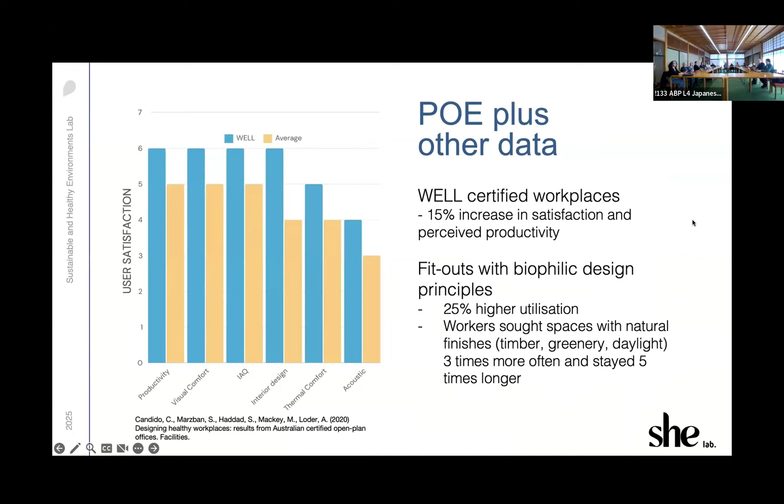POE data becomes very, very interesting when we move away from one-off building by building comparison to actually doing a database level comparison, because you can start benchmarking. Property industry loves that, because it's like, I'm better than my, they are the landlord, or they are the tenant, or whoever they want outside.

But also with stories around, very commonly recently, we are the very first in Australia to have a score in acoustic comfort. Mind you, these are all open plan offices, so acoustics suck, right? That actually breached the 3-point mark. So it means that out of a 7 being the maximum score that anyone can ever get, they got a 3.7, that was reason for celebration, because the average benchmark is only 2.8.

So being able to say we outperform in specific points, it gives people leverage of data from a competitive edge perspective. But by doing that over time, which is the other graph there, we've been able to demonstrate changes, right? And that one is particularly interesting because you can see on the blue line that acoustic comfort post-COVID has really taken a hit.

And I would speculate that this is our tolerance to acoustics going down, but our expectations being on the rise, because we know better now, because we have our own bespoke office setups, and we know now that we don't have to have that sort of exposure in a shared office.

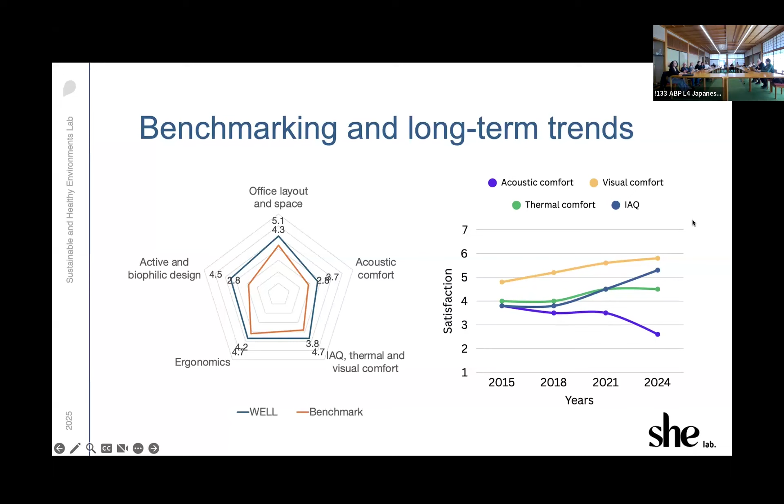All of these data, of course, we can also start celebrating case studies. I think the fact that we have, out of the top 10 buildings in our database, 3 actually being adaptive reuse, but also went through a massive HVAC retrofit, dispels the notion that you can only do well if it is a new build. So out of the 3 buildings that I mentioned, 2 are heritage buildings.

And they really invested a lot of time to make sure that those spaces were delivering on what they promised back to building occupants, because the buildings matter a great deal to those people as well. So there was that story of love and care around the relationship with the building. We're about to start another one that is actually here in Melbourne, and I'm actually looking forward to that. So our adaptive reuse and retrofitted buildings, which we have 3 out of the top 10, as I said, do really well, as the data show.

And they do really well in things that are quite curious to me. So for example, visual comfort, natural light, I'm not surprised because they put a lot of effort in the way that the facade was being designed and how they changed. I think all the building owners were particularly pleased in terms of the indoor air quality and thermal comfort achievements.

But I think from an interior design perspective, there was a really big surprise because people didn't want to move into that space, because in all of these spaces they implemented desk sharing. So it was an activity-based working environment, but people were still satisfied with this space. That was quite surprising.

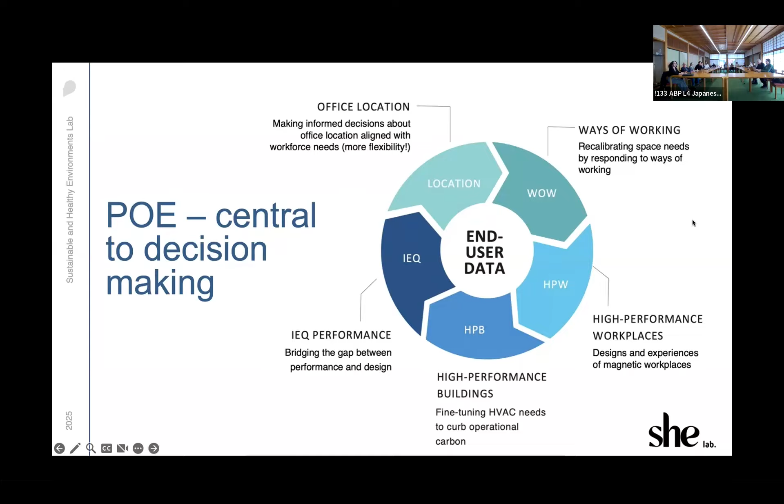This was actually a portfolio level POE that we did. We had about 100 offices, and the most important question back to them was how satisfied people were with the building location, but also with commute times. So they used that to inform the next location of the entire portfolio, which is kind of interesting.

So in short, POEs can be used very successfully in these 4 different ways that I've seen over the years. From a diagnostic perspective, they can be quite useful to understand what is happening now, but also over time. Before and after interventions are very popular and very peculiar to the Australian market. I don't see that elsewhere around the world. It provides a really good baseline to work with, but also provides an opportunity for you to test the interventions, if they worked or did not.

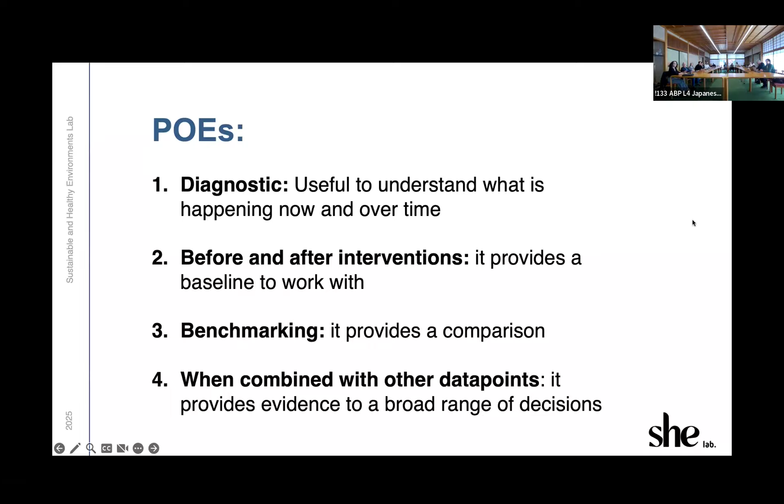Benchmarking provides a point of comparison. So being better than the next person or the next building is quite important from a competitive edge perspective. And when you start combining all the data points, then it provides bigger picture evidence for a broad range of decisions that is not just about people and people productivity, but also other types of decision-making that you have to make on these spaces and the layouts of those spaces.

That's it from me. I think I'm on time. Well done, Christhina. Breaking from tradition and actually finishing on time. There's lots of really good stuff in there.

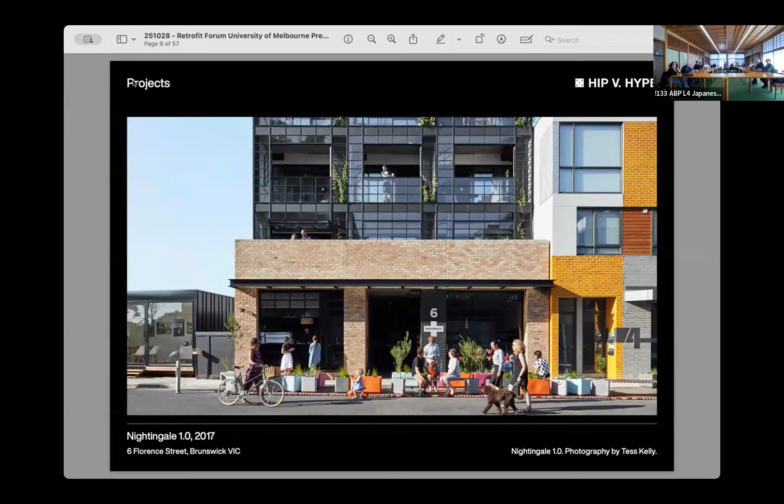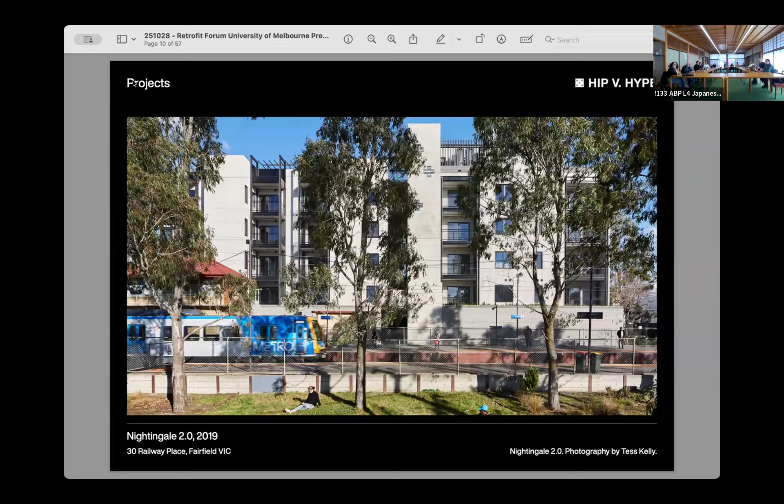Some townhouses in Abbotsford. We helped to set up the financial model that exists behind Nightingale. That for me was really, having studied architecture, going across to private development, really putting that learning to the test in helping to set up the investment structure and the procurement model for the first two Nightingale projects. We were investors in both of those projects. This is Nightingale 2 in Fairfield, still to date the most difficult project I've delivered on a railway line, but pertinent given some of the ambitions for our city at the moment.

This is a small sort of Baugruppen model that we tested, 3 townhouses in Brunswick. We had the Premier here a couple of weeks ago announcing a new policy, which was kind of cool. And we lived in this project, and that front fence got plenty of use during COVID. Sort of an interesting idea here, we actually set up a shared ownership structure over that front yard. Typically, your front townhouse is always worth more than the rear two due to its frontage. So we set up a shared ownership model for each of the 3 townhouses over that front yard. And it's a space that we really enjoyed using as a collective. This is 5 years later, we shot it recently.

A really important idea for us is this idea of architecture of future heritage value. So when you're designing and building a building, what are the decisions that you can make that could enable that building to be loved and want to be protected by a community in the future? It influences what materials you use. It influences how you detail those materials, how you can expect a building to perform over time. Landscape obviously plays a huge part. Ruskin Elwood down the canal in Elwood, 5 years later, again, buildings that age gracefully and become part of their community. I think developers don't think enough about these sorts of ideas.

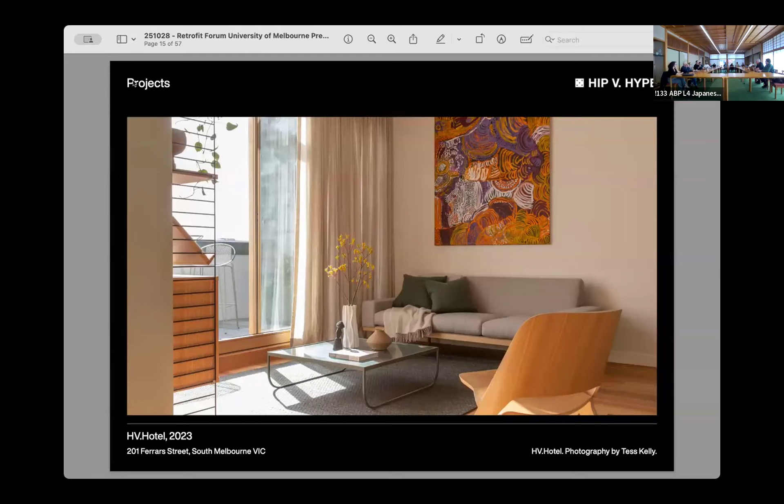And one of our focuses for this space is to get as many conservative-minded people in here as possible. And so we've had all sorts of ministers from both sides come into this space, bankers, lawyers, you know, the types that are usually quite skeptical of the benefits of sustainability. And when we bring them inside and we close that door and I lock it, it's a light bulb moment. It's a great experience. Tangibly, it is quiet. And for anyone that's been in a passive house level home, you get that feeling of fresh air due to the HRV.

So this is the rooftop at Ferrars & York, nice community space. You get a hard time putting a fireplace in a sustainable building, but sustainability is more than just carbon. And that fireplace is the heart of the building, and residents use it regularly and they connect within that space all throughout the year. I think that's also really important to note.

And sustainability, I've sort of been through that, but post-occupancy research. So our model is one of, we design, we build, we finish, we live in, and we want to know whether our design's performing as per our assumptions. And with an in-house team, we have an ability to throw some resources at that. So some of the questions we ask are: is systems design optimized for efficient, effective operation, and are systems commissioned properly?

So we had a relatively small sample size in this project, 20 apartments. We tested 2 apartments. On our future project, which I'll get to, 61 apartments, and we would love to find a research partner to look more meaningfully at post-op performance.

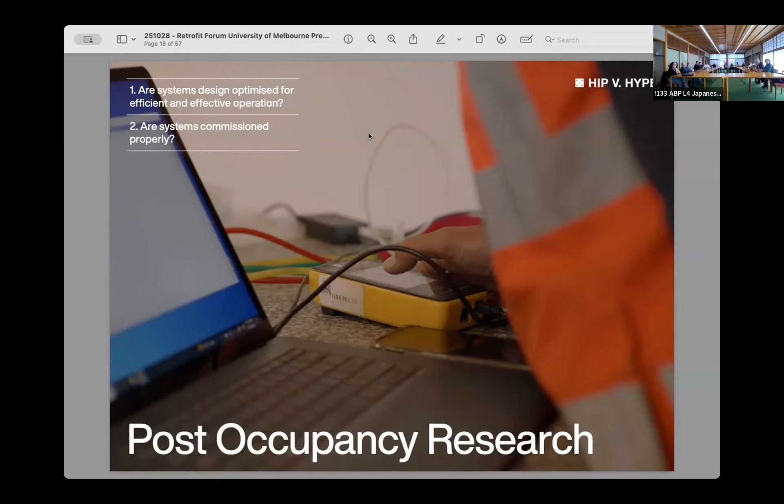Here we go. So during construction, we had our teams on site. We were tracking all sorts of things around how builders were performing in accordance with the sorts of assumptions that are built into NatHERS, the small things like insulation installed around penetrations. Turns out guys just cut big squares. NatHERS modelling assumes that it's cut tight. Got plenty of photos of it not being the case. I wonder how many buildings around town are built that way. Yeah. So those sorts of things.

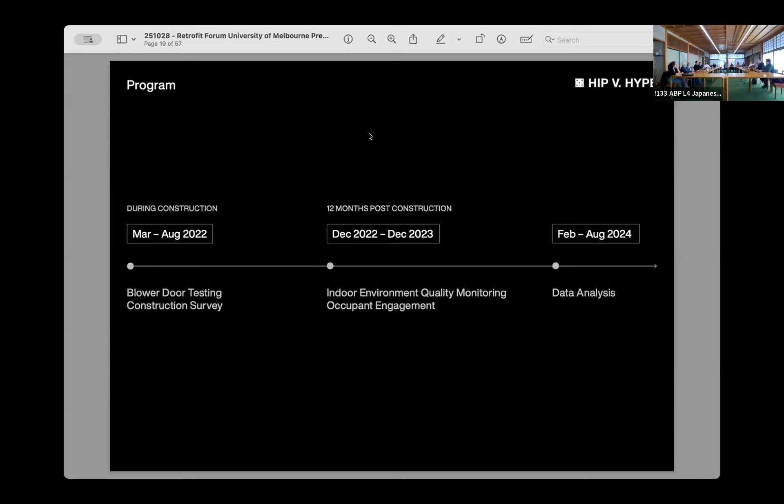We did a blower door test to set a baseline. We didn't try to achieve high levels of air tightness on this project and found some interesting results. Then we did about 12 months, so we got 4 seasons worth of post-occupancy data and spent too long analysing the data. But anyway, quite a few data points.

And this is the apartment that I'll talk to. This is the apartment I lived in for the last 3 years. I've just recently moved out. It's my little family, Katia, our 2 boys, Masi and Elio. It was 185 square metre, 3-bedder, built to 8.1 star NatHERS with a heat recovery ventilation system installed.

We, knowing what we know, having tested the performance of Nightingale 2, will not build an apartment to current code without HRV installed. What we know is that the air tightness of current code compliant apartments is significantly lower than 5 air changes per hour. So we're looking at needing active heating and cooling, active mechanical ventilation in apartments that are code compliant, let alone built to the level that we're achieving.

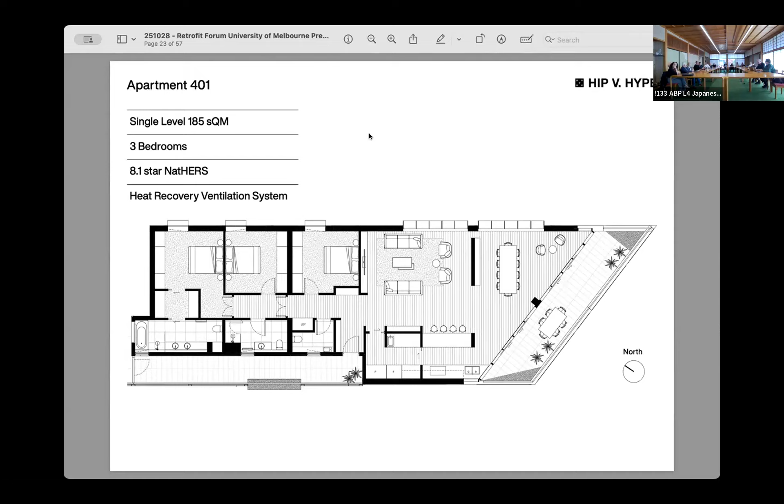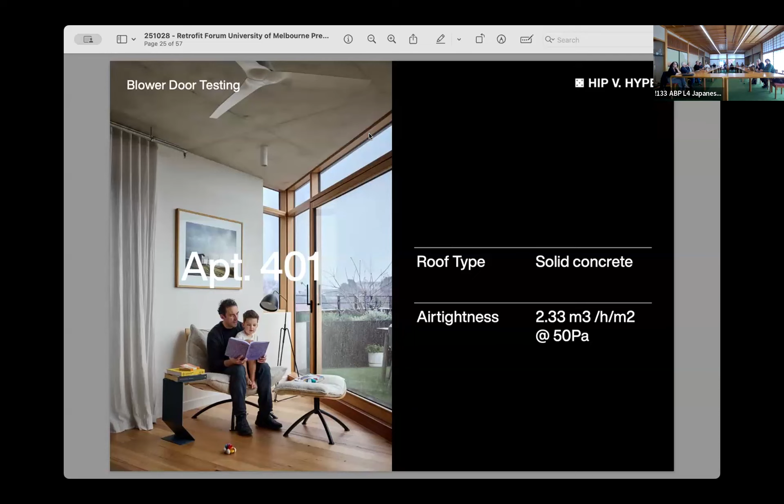Blower door test, this big fun day. Concrete box, fire standards have improved, all penetrations are being inspected now. Window installation regimes have improved in accordance with minimum compliance requirements. This apartment, without trying, achieved 2.33. It's really interesting. We've got a massive problem with the disconnect between what we're actually building and what our mechanical design assumptions are assuming in terms of system design. So yeah, buildings are growing all sorts of fun stuff at the moment.

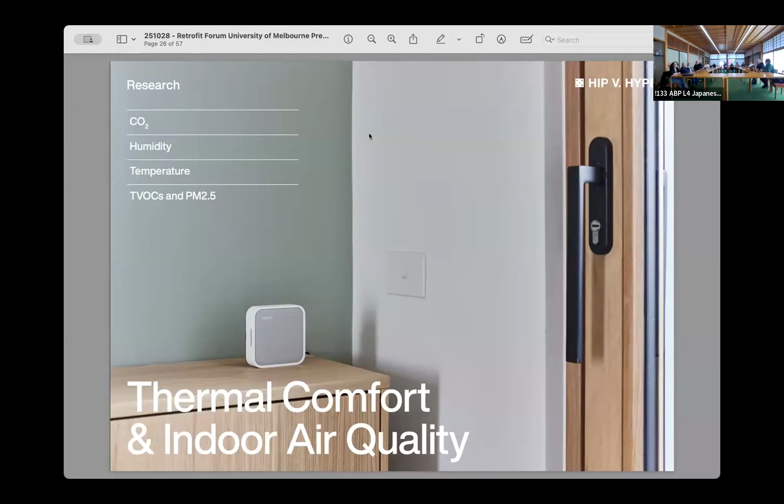It's fair to assume. We put Awair sensors in. We weren't as rigorous as Pippa in choosing our device. But we thought they were pretty good, and we put one in, and just testing key metrics, I guess, of IEQ. And like I said, we had about 6 sensors deployed in this one apartment and 6 in another apartment through that 12-month period. What we learned, it's a pretty cool graph. So the solid band in the background is the WHO comfort band.

The dotted line, the green dotted line, is what Homes Victoria regard as their thermal comfort limit, which is high and kind of scary. And then you've got minimum and maximum daily outdoors, which are the bounds to this graph. And then we've got our apartment 401 temperature. So we were lucky enough to have some control periods. The apartment was unoccupied basically for a month through January, so we've got a really good control through the middle there.

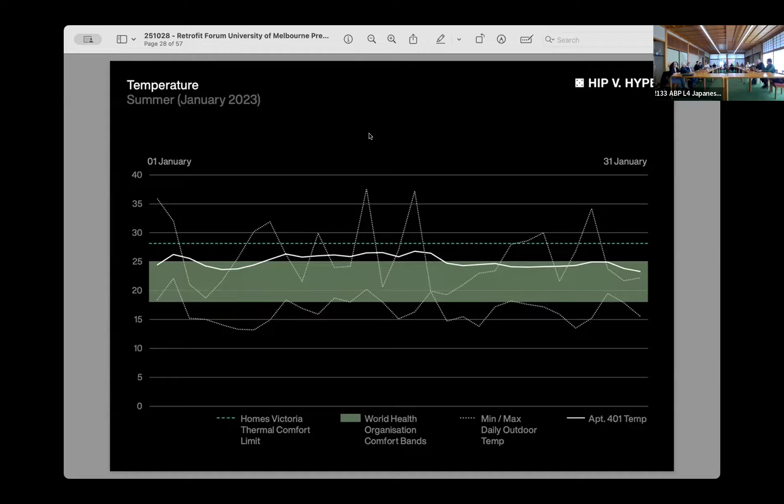We've got 2 days creeping up towards consecutive days. We've got a bit of a heat wave, 37, 38 degrees. Apartment's staying well below Homes Vic, peaking its head above WHO, but generally sitting within WHO thermal comfort band without any active heating and cooling, and zero management. So external blinds were down to the east, but no management, no flushing at all. It's pretty compelling. It's a small sample size, but pretty compelling.

In winter, around a couple of weeks, the apartment was unoccupied there through the middle. What we see is a steady decrease in apartment temperature. Again, unoccupied, no active heating and cooling, steady decrease, steady state temperature sits just under 18 degrees. And then we came back and obviously heated the apartment up. Interestingly, there's no apartment above, and both apartments below were unoccupied, so we weren't enjoying the benefit of thermal transfer either.

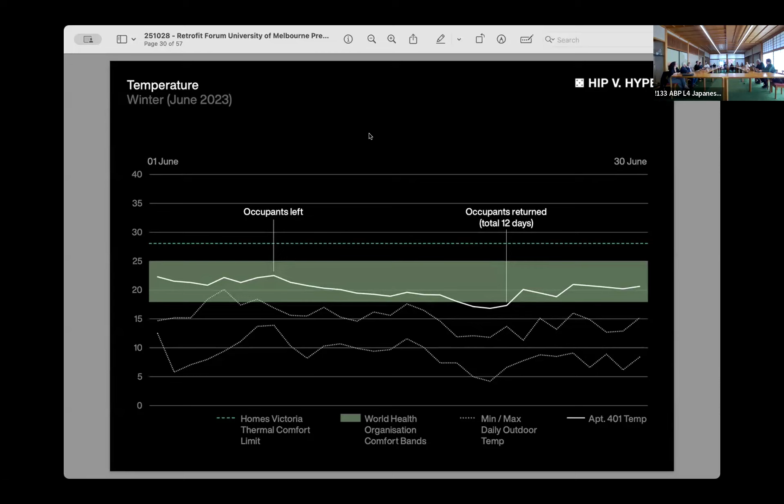And does Homes Vic have a minimum thermal comfort? Not that I'm aware of. They probably should. And we don't have an average Victorian to compare it. It's scary. I'd love to know if someone's got the bottom of the chart on some of this. Some of the stats we hear are that in the average rental apartment, the overnight temperature is below 10 degrees internally. And definitely HV's stock would probably be performing outside of that. I work with people that deliberately don't put the heating on because they can't afford to pay the bill. This is part of our little point. That'd be interesting.

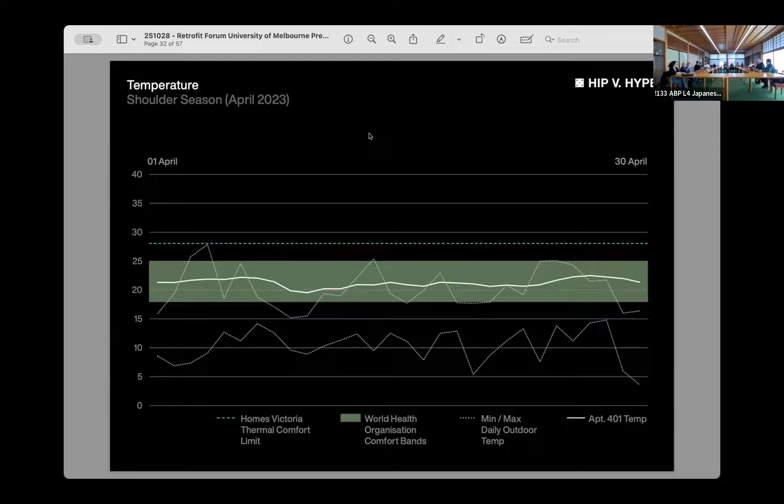Shoulder season is where we get the best performance. This is really where apartments in the Melbourne climate are optimised with HRV. This is where you really get the benefit. So you're just not turning heating and cooling on at all. With the apartment closed, if you want to, you're living very, very comfortably with incredibly good IEQ performance. And having lived in this apartment for 3 years, it's just testament to the quality of life that you enjoy.

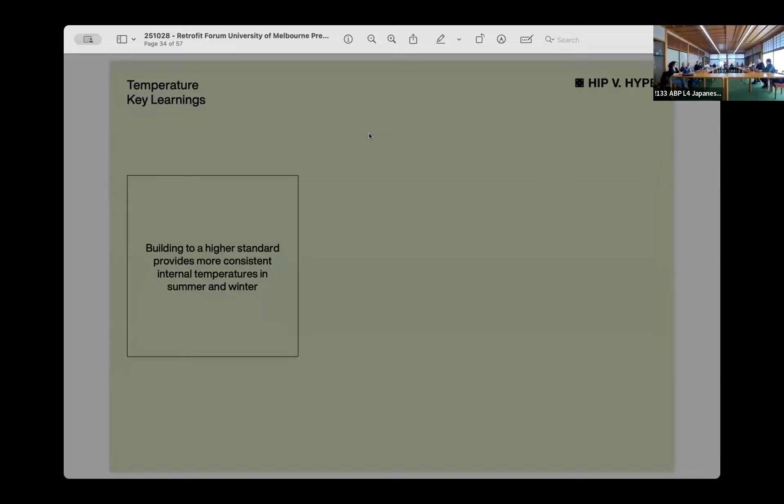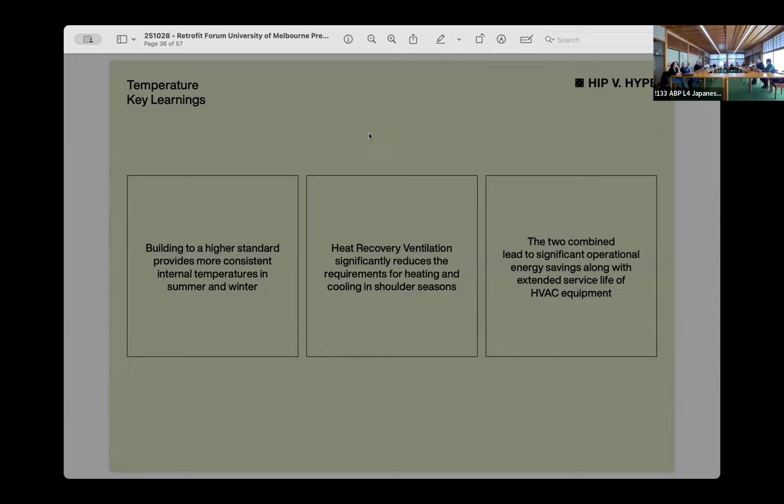So key learnings: built to a high standard, provide more consistent internal temperatures in summer and winter. No surprise to anyone here. Heat recovery ventilation significantly reduces requirements for heating and cooling in shoulder seasons, where you get the real kicker on performance. And the two combined lead to significant operational savings. And one of the things we're prosecuting out there is the reduced intensity and function of the systems you've installed would see those systems last longer and be maintained less. So there's an operational cost saving as well as a maintenance replacement life cycle cost saving.

We ran some quick numbers for some of our clients, build to rent operators, or Homes Victoria, or Homes New South Wales, or some of the community housing providers with significant portfolios. Just looking at the scale of portfolios and what the energy cost savings could be over a 10-year period, trying to prosecute some commercial arguments out to market. Looking at a very conservative $7 million saving on an apartment built to 8-star versus minimum code compliance. Pretty considerable savings that could be reallocated to better uses.

Significantly improved health and wellbeing outcomes. So the IEQ data we're getting, we haven't brought it into this presentation, but humidity levels really strong, particulate levels, HRV playing a really effective role in removing particulates after cooking. We had a sensor in one of our child's rooms, and you get a spike when you change a nappy.

Yeah, it's pretty funny. So all sorts of stuff you scrape out of this, which is valuable, and stories and narratives to build into how we engage with clients. So averages for CO2 below best practice 800 parts per million. Higher recordings in winter, interestingly, with higher occupancy. This is one of the areas we've sought to optimise in our future design. We weren't quite happy with the performance of the HRV system based on the results we're getting back. Volatile organics, again, staying within, that's the child nappy example, and really just good results all around.

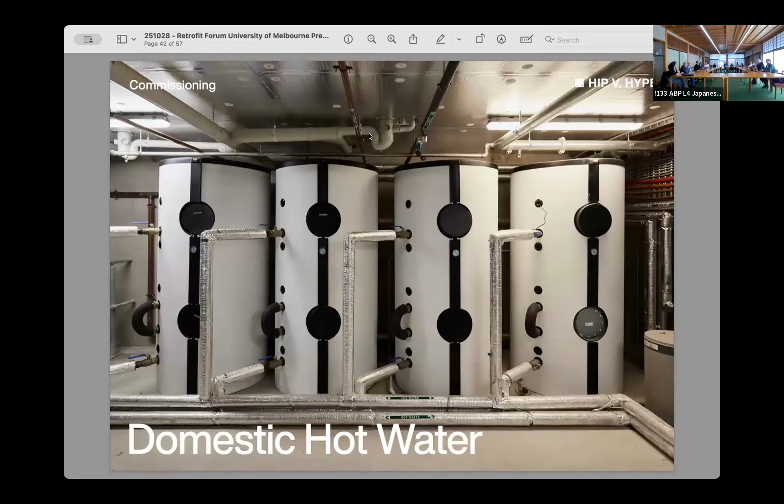So in the design and construction process, services engineers had designed, the builder had built, the plumber had installed, the supplier had verified commissioning, but nobody had actually done a performance test on the system. At an asset of this scale, 20 apartments, you don't have the resources to necessarily come and test things to make sure everything is operating effectively.

We set about getting everyone to site, all the relevant parties. You can imagine fingers pointing - you're responsible, you're responsible, you're responsible. Luckily, our sustainability team weren't novated. They sat under us as client, under the contractual procurement relationships.

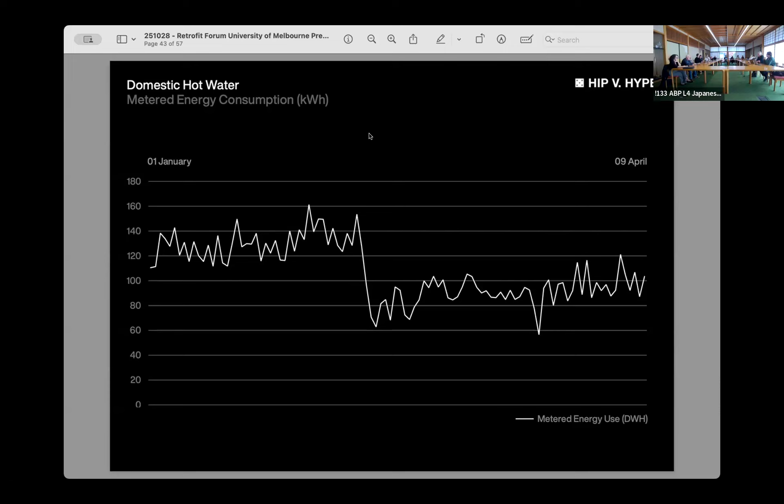We brought this data to the table, and Stiebel really took on responsibility and worked with us to solve the problem. Turns out the problem was linked to a booster, an inline booster that was heating up the ring main. The centralised hot water ring main was being kept at about 70 degrees and had been operating at that temperature for 3 months. That was one thing, a really quick switch to flick, and we got a 30% saving. Stiebel then spent 18 months further optimising the system for the Melbourne climate, feeding that data into their data set - they didn't have a data set for the Melbourne climate.

That's really resulted in Stiebel, as a business, having a unique understanding of the operational profile of a building of this scale in the Melbourne climate that they can use to further optimise their systems.

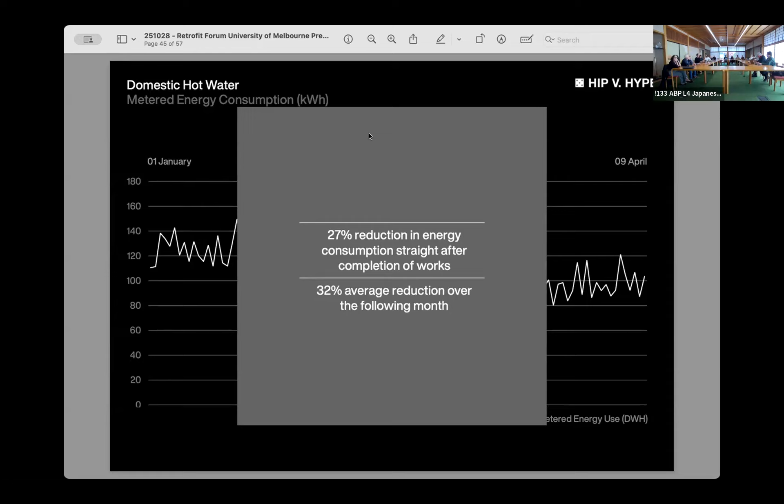I'll skip through this because I need to get to the end of my talk, but application for us - the two key areas we've focused on - this is our next project, Parklife 2 in Brunswick, designed by Austin Maynard Architects. Our team led a detailed performance briefing exercise based on the data set we'd gathered from Fries and York, setting performance parameters for the services engineering design. We focused in on HRV design and hot water design.

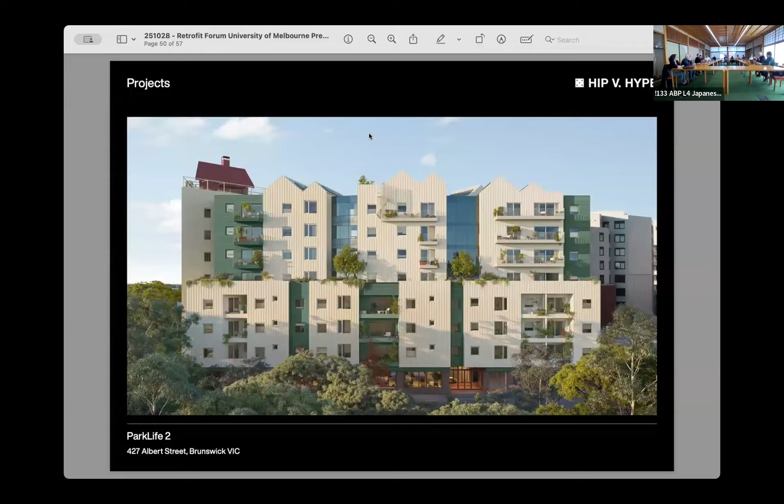Why is this important, why is it relevant? Because nowhere near enough built environment professionals, particularly in the commercial market, spend enough time seeking to optimize their design, procurement, delivery, and learning to iteratively improve upon the products they're delivering. We're seeking to do that actively as a business that's interested in driving the industry forward.

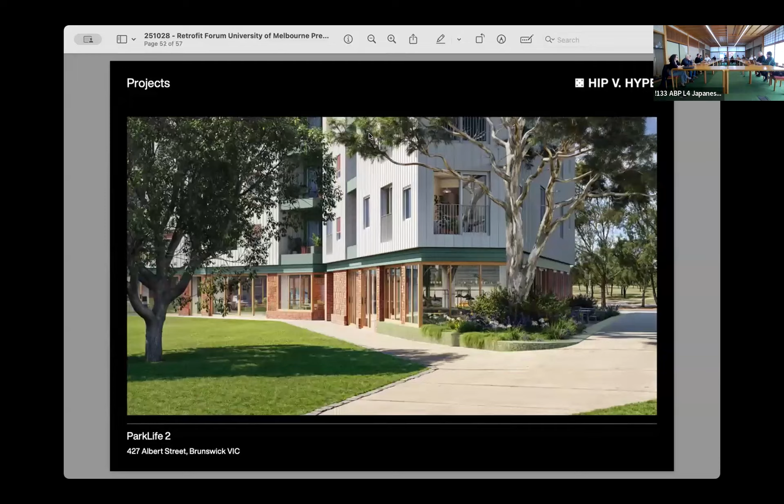One thing we've incorporated into this project - it's really cool when you get into the detail - we've got a BMS installed and designed into this project, and we've built it into the contractual relationships in the contract of sale. We've gone to the extent of thinking, well, that data will exist, we want to be able to access it. So we want to notify people buying that we'll be accessing that data - it will be de-identified and used for research purposes. You've got to think at that level to be able to move forward at scale. So if someone wants to partner on a meaningful sample size for this project, let's do it.

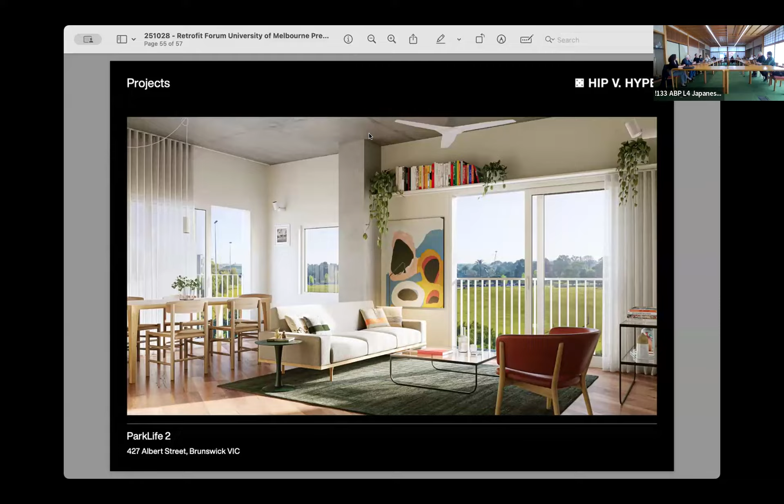Really interesting stuff there. I'm a structural engineer and I'm just amazed at all of this stuff every time we start to talk about it. Are there questions around the table people want to ask?

Thanks - probably for Liam, although I really enjoyed your talk too, thank you. On thermal bridges with windows particularly, I regret not doing thermally broken windows on my redevelopment 12 years ago, and it's definitely - even though I've got light coloured metal windows - the weak point. As a developer, are thermally broken windows more standard and affordable now, or is there still a big uplift for doing thermally broken windows?

Depends what builder you go to. This is the other thing you learn. We've just recently run a tender process on this project, and it's remarkable to see this in real time - two of the builders have established relationships with window suppliers that can supply thermally broken windows competitively, and two of them don't. And the difference is about 30%.

It just tells you, number one, tender, because you find stuff like that out. And number two, capacity building in this industry is so important. The reason that the two builders that do have that IP in relation to better quality performing windows at a lower price, they have it because they've built two Nightingale projects and another high performing project. So it's these projects that are seeking to push the industry forward, these case studies, these exemplars that build capacity in the system to enable us to access global markets. Because this stuff's being built at volume, at scale for global markets, and we're just a tiny portion of that global market.